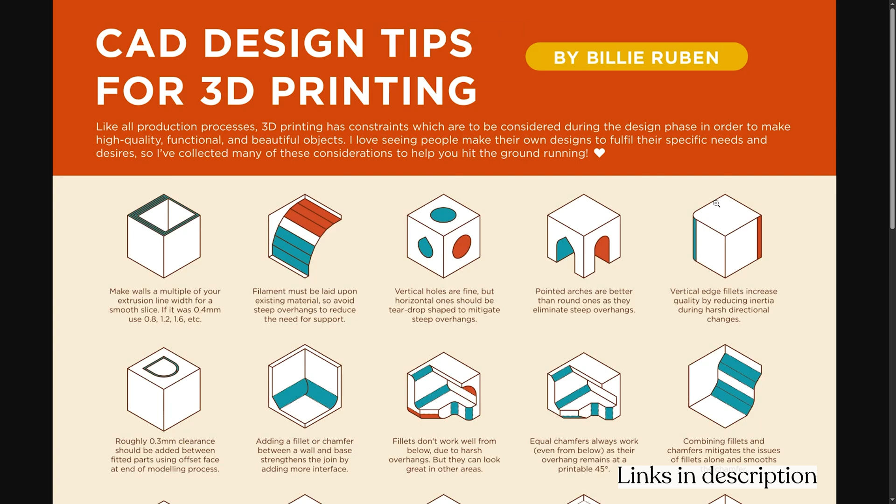And in this video, I want to share a few tips and tricks that I think you will find really helpful, especially if you're just getting started in your CAD journey. This poster by Billie Ruben is a must-have for anyone who's doing CAD with the goal of 3D printing their own parts. It's filled with some really good tips that on the outset seem really simple, but once you've made a few mistakes you see how important they are.

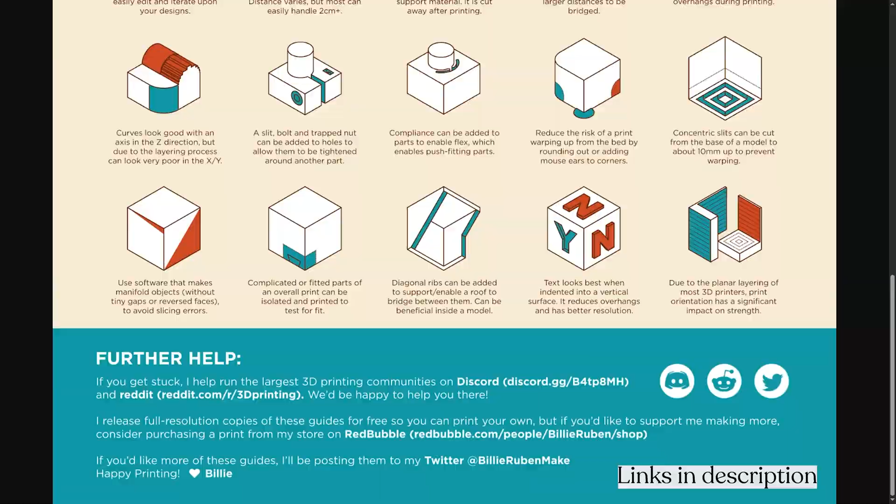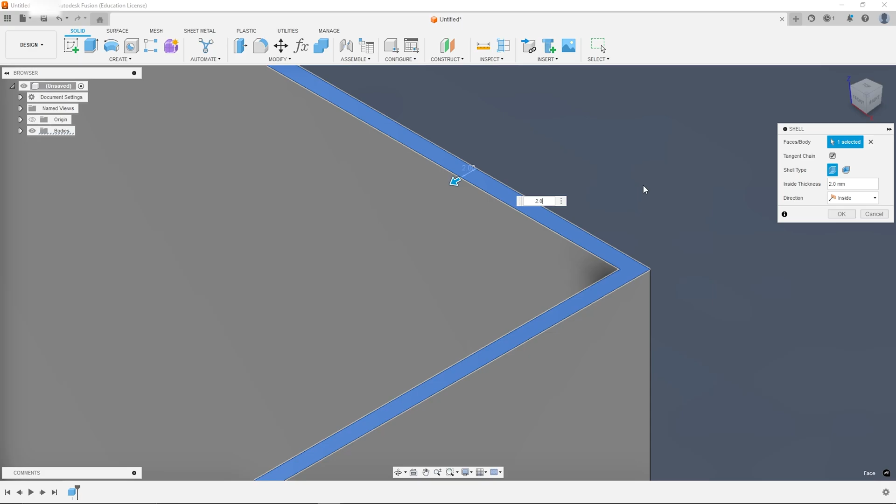So the first tip on this sheet that I think is really important is to keep your wall thickness a multiple of your nozzle size. So what this means is that when you're designing your parts, you want to design them so that the thickness of the walls is a multiple of the nozzle size that you're using. This is super important because when your printer lays down the perimeter, if you followed this rule, you'll get nice smooth walls. Otherwise, the printer has to kind of combine different thicknesses to get the size you specified, and it ends up giving you rough surfaces.

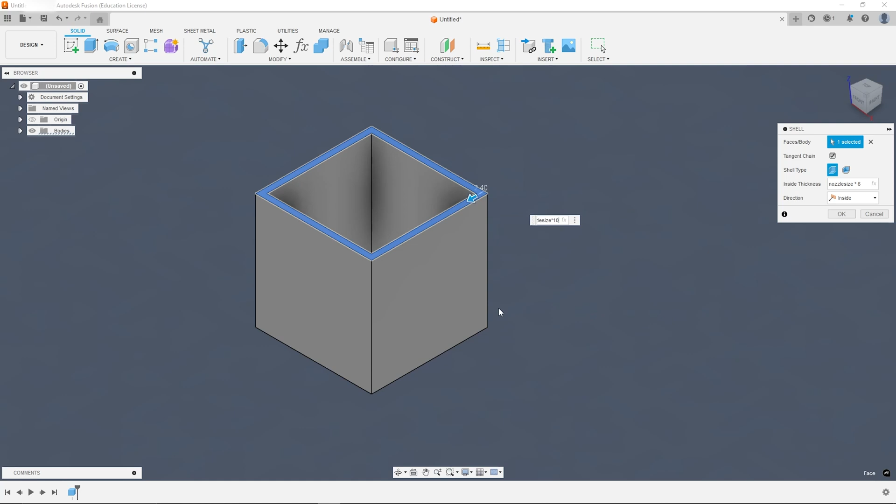Now in Fusion, this is really easy to do. All you need to do is add the nozzle size that you're using as a parameter, and then reference that when you're modeling. So when you're actually making the model, you can do nozzle size, or whatever you name the parameter, multiplied by whatever number you need to get the wall thickness that you want. And this might involve a little bit of trial and error, but it means you're always getting a good multiple of your nozzle size, meaning your parts will look and fit better.

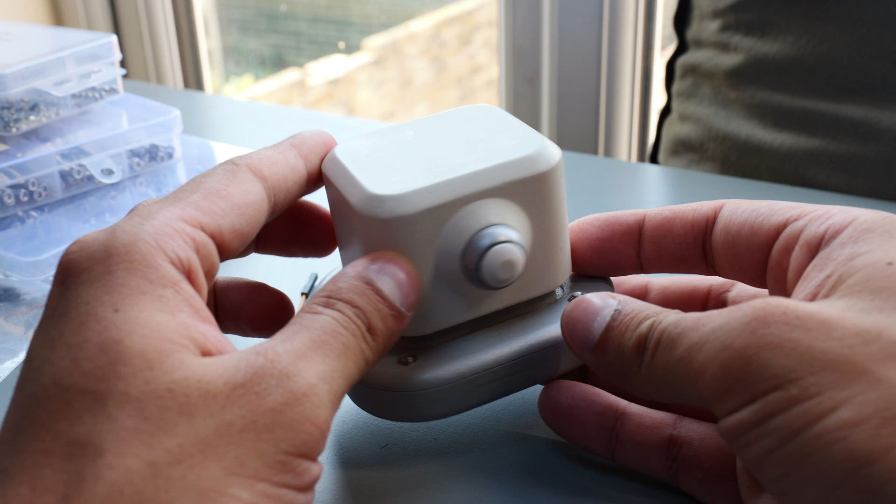And the second tip that I think is really important is to fillet your corners. So filleting your corners is a great way to not only make sure your parts look more professional and polished, but it also helps with bed adhesion. When you have sharp 90-degree angles on your corners, the tool head, as it's printing, has to quickly change direction, and over a series of layers, as the print starts to cool, this can cause your corners to lift. By adding a fillet, what you're basically doing is letting the tool head move in one smooth motion as it lays down the perimeter, reducing the chances of corners lifting.

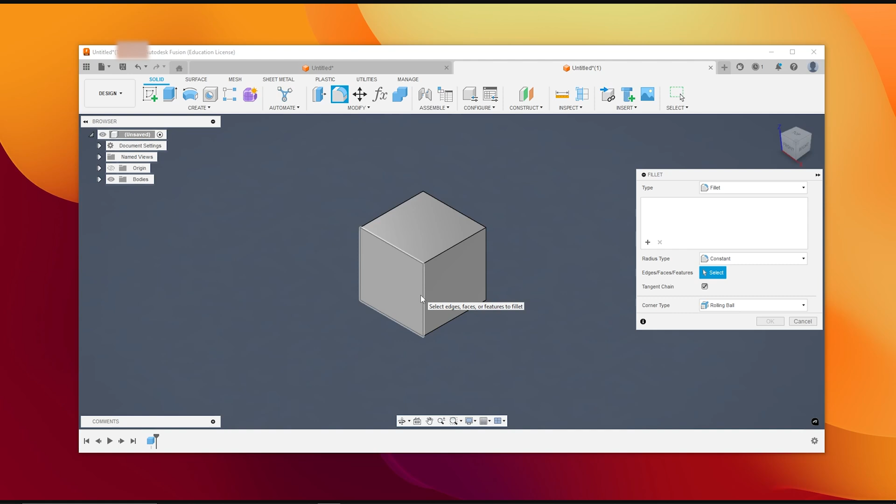And in Fusion, this is really simple to do. All you need to do is select the vertical corner that you're trying to add a fillet to, press F, and then add the size that you want. Again, you might want to try different sizes to see what suits your particular use case.

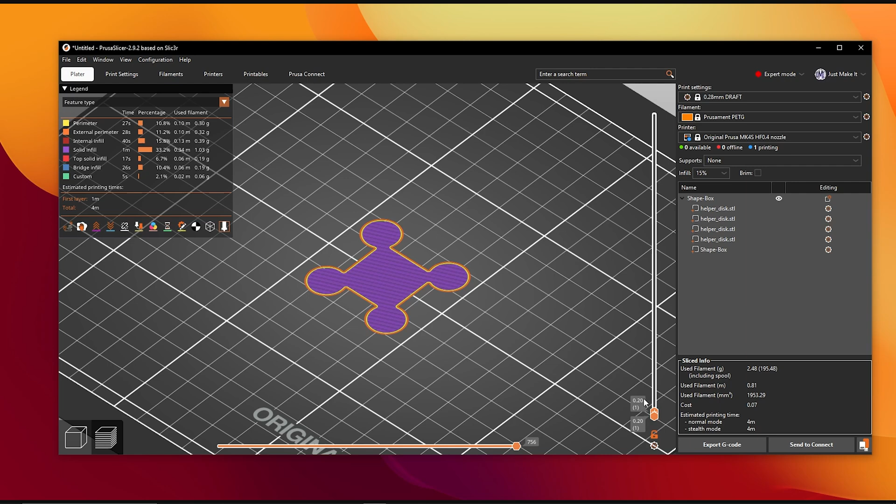And number 3 is the use of mouse ears or helper discs. So if you're printing a part where filleting the corners isn't an option, for example it's a really particular fit or it's a model somebody else has made, you can add mouse ears to help bed adhesion. Mouse ears basically increase the surface area of your first layer, and they act like little sticky pads, giving the bottom layer more grip on the print bed.

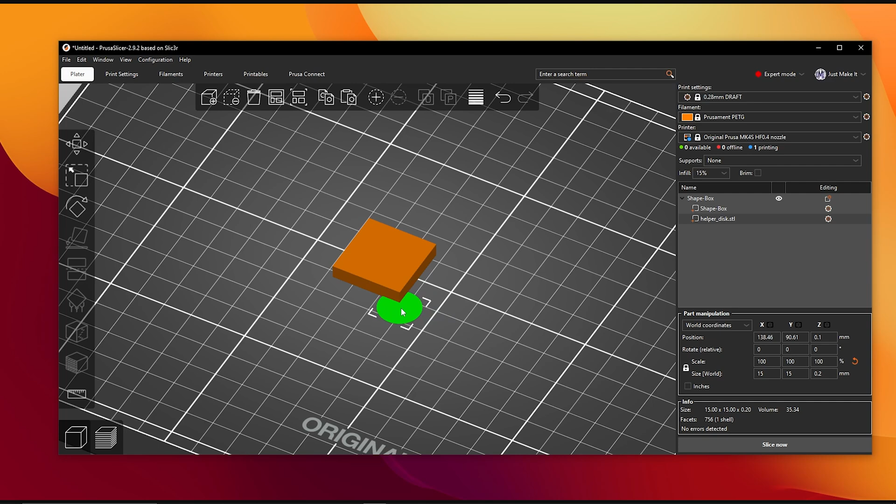And you don't actually even need to model these in your modeling software. Most modern slicers have these available as an add-on when you're slicing to send over to the printer. So I like to use Prusa Slicer. If you want to add a mouse ear, you select your model, right click, follow these steps and just add mouse ear, and then on the right side make sure you drag your model all the way to the bottom, as that will affect the order in which things are printed. And then once your print is done, you can simply trim these off using side cutters or a deburring tool, and you're good to go.

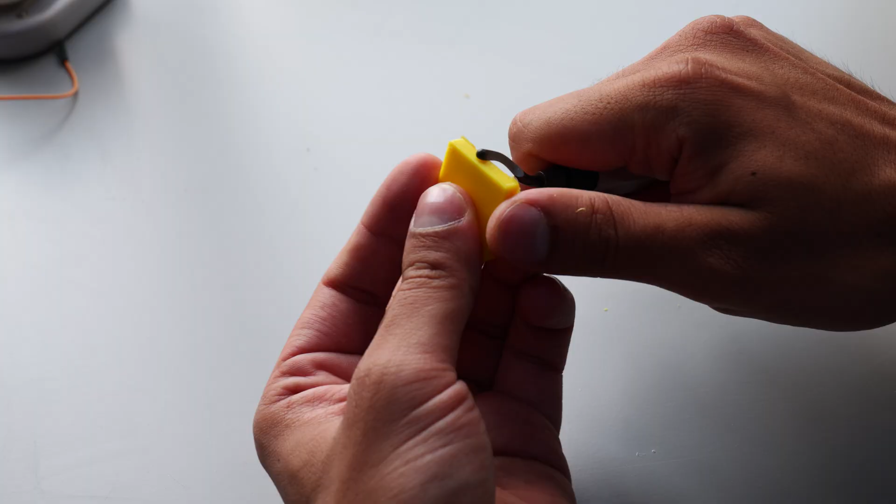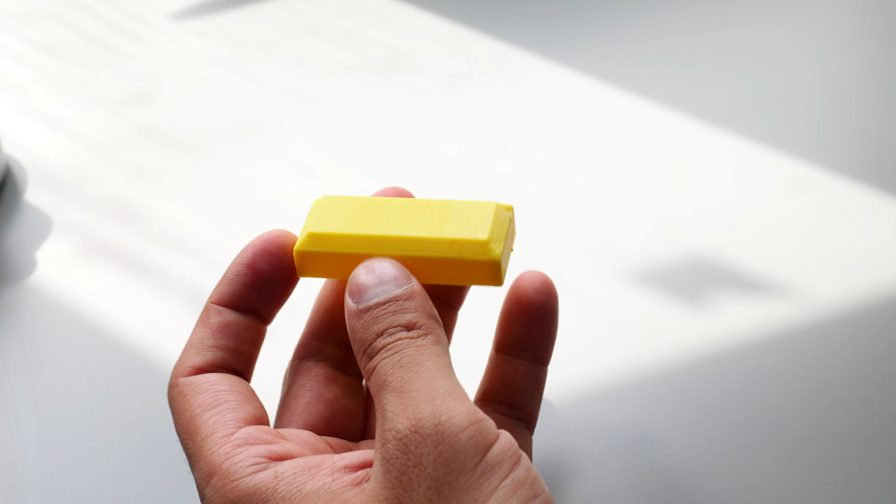And number 4 is chamfer your bases. So if you want to add an edge to the underside of your print, either for fit purposes or for aesthetics, you want to use a chamfer rather than a fillet. Fillets on the underside of a print won't print well due to the overhang angle. You'll end up getting that sloping surface on the print which nobody wants. Whereas a chamfer will print nicely as long as it's within the limit of your printer's overhang ability, which is usually about 45 degrees.

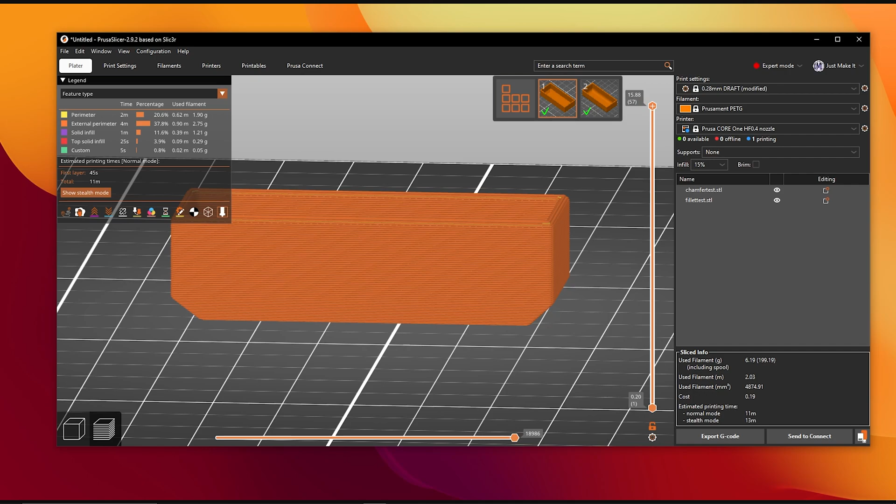And again, this is really simple to do. In Fusion, you simply select the edges that you want to add a chamfer to, hit your S key to bring up the shortcut menu, type in chamfer, select chamfer, and then add the size that you want.

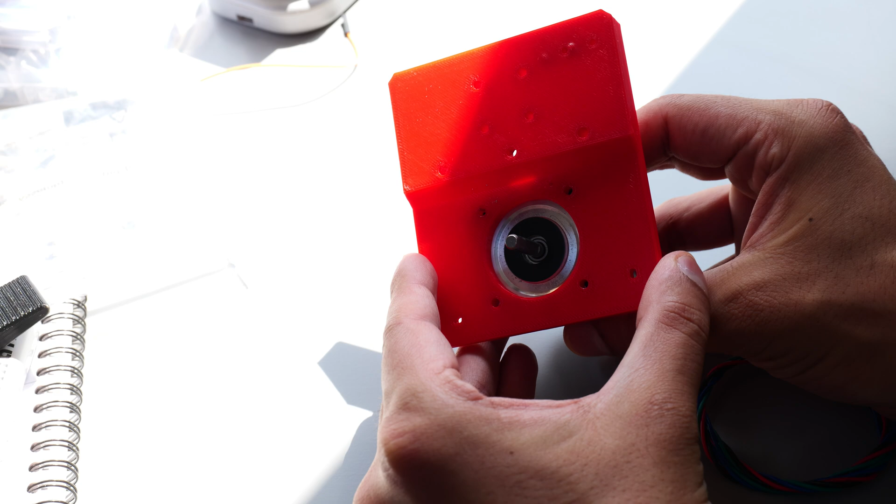On to the next tip, teardropping your holes. So whenever you're printing a hole, you want the shape to come out cleanly so that your parts either look really good or fit together properly. This isn't an issue when your holes are vertical, but when they're horizontal, there's a risk of the top part of the hole being flattened as your printer attempts to bridge over those surfaces. And then what ends up happening is the part doesn't look good, or if you're trying to fit something into the hole, it won't fit, and then you need to either get your Dremel or deburring tool out, and it all just gets a little bit messy.

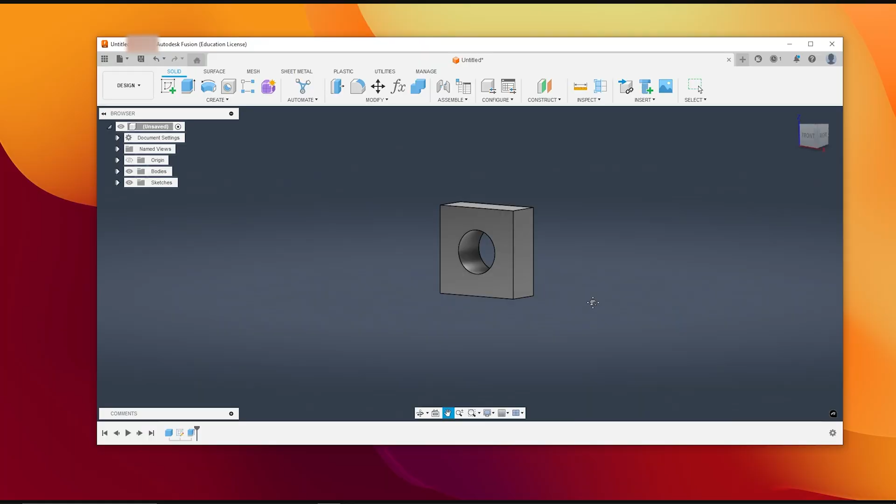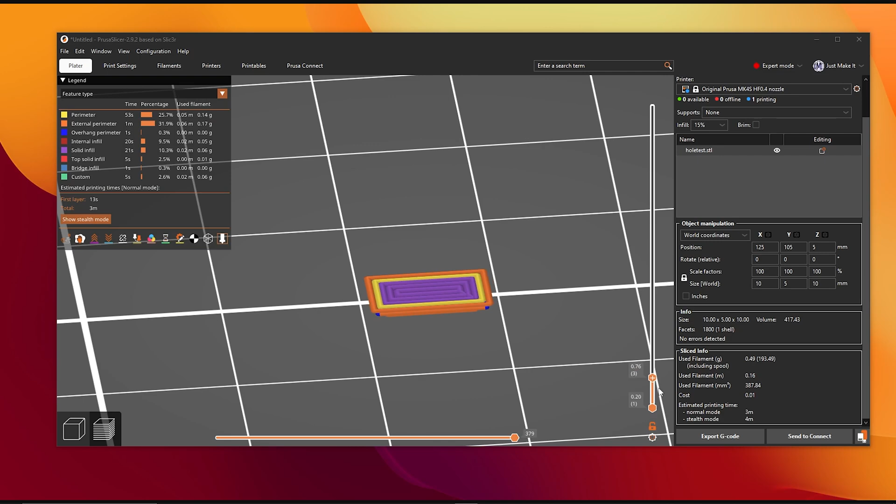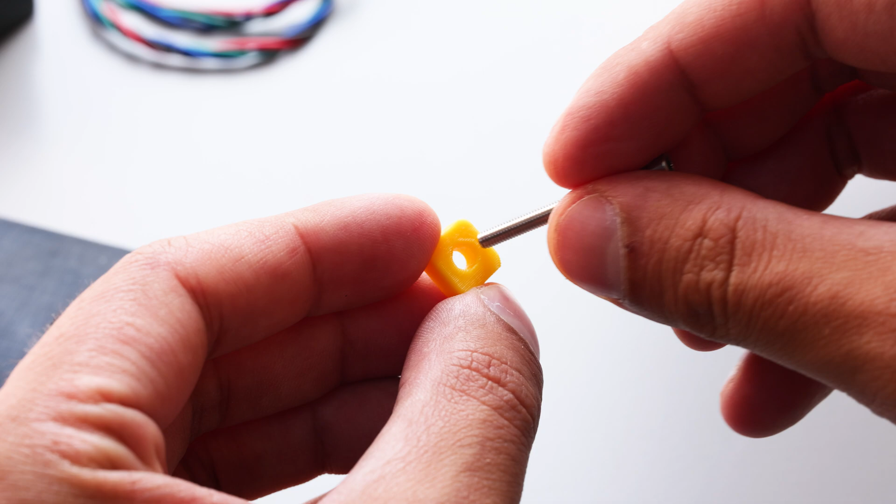So a way to compensate for this is when you've modeled your hole, modify the sketch so that you create a little teardrop shape on the top part of the hole, and then extrude that through. What will happen then is when your printer comes to this part of the hole, it will create like a small arch rather than flattening the top of the circle. It does mean it may not be a perfect circle, but the benefit is your parts fit a lot better, which, depending on the case, may be more preferable.

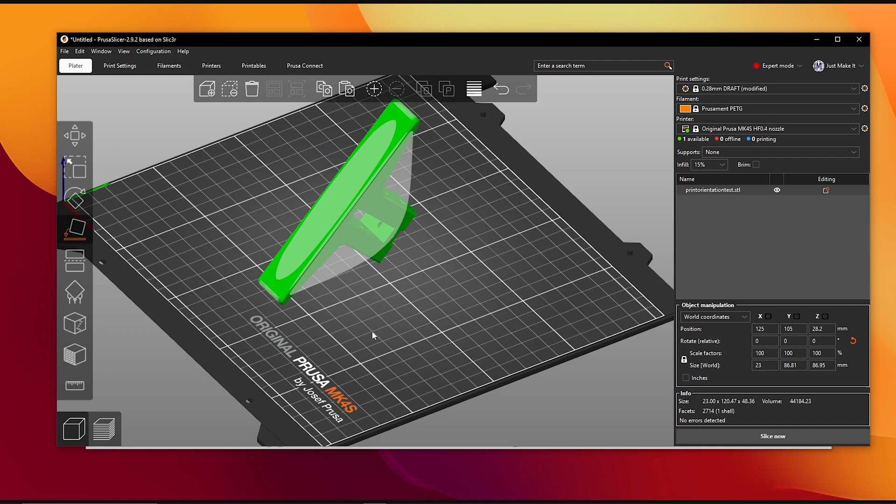And last but certainly not least, think about print orientation. So whenever you're designing your parts, you want to begin with the end in mind and always think, how am I going to actually print this, in what orientation? This is particularly important when you're designing parts that might be under mechanical load. You want to consider the orientation of your layer lines and use them to your advantage.

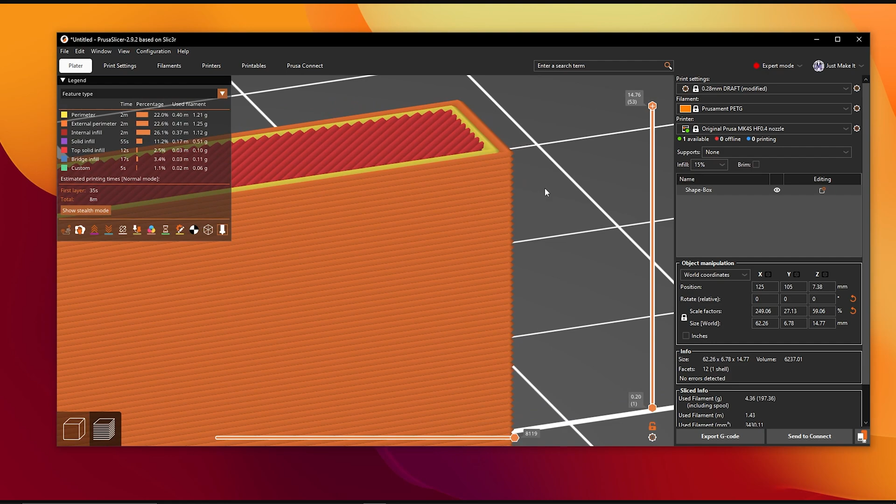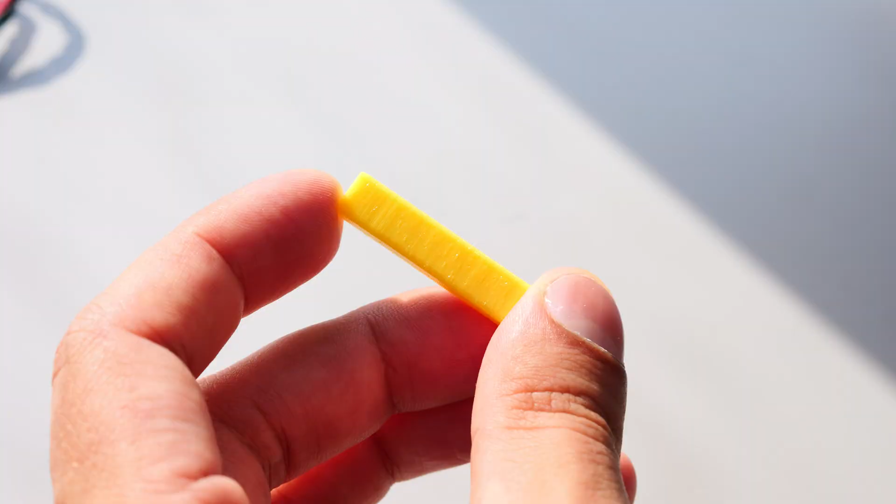If you print and load your part perpendicular or against the layer lines, your print is more likely to delaminate and therefore break. Whereas if you get the same part and load it parallel to the layer lines, you get a massive increase in strength because you're working with the layer lines, similar to wood in a weird way. So always keep your orientation in mind when modeling. This may mean you have to modify the design to allow for support material or any of the other things that you might need to do, but the benefits pay off in the long run when your part actually survives.

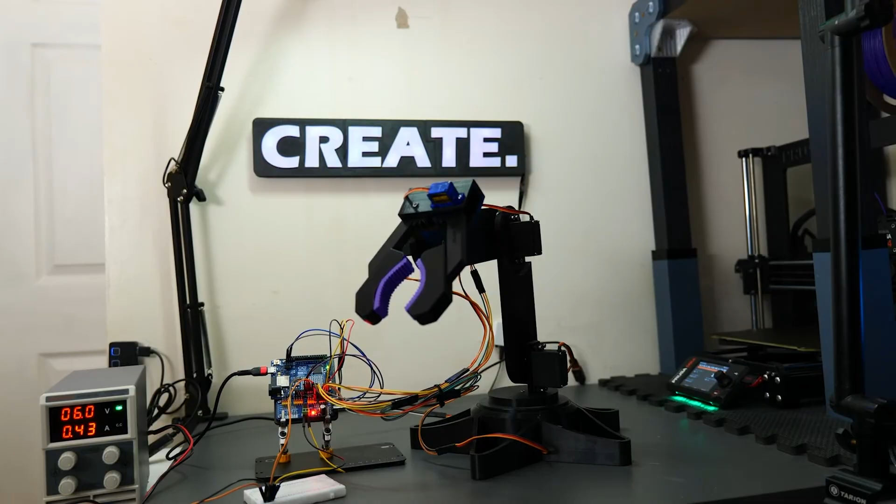And that's a wrap for this video, guys. So I just wanted to share a fabulous resource and some really important tips that I think beginners will find particularly helpful.